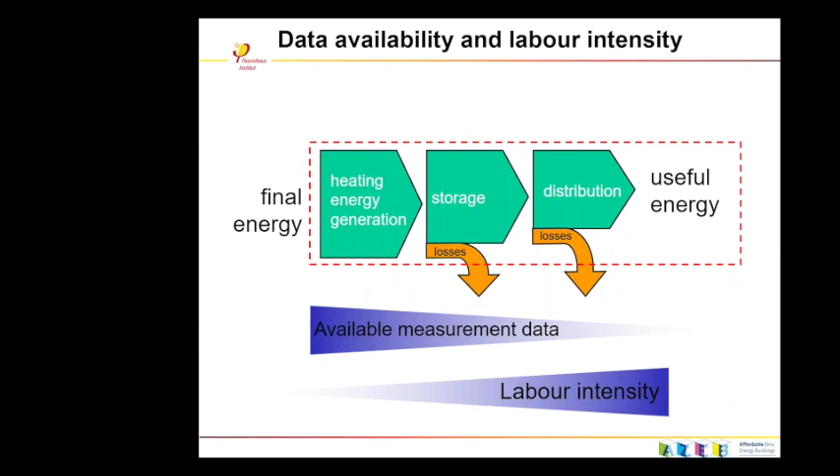That is not to say that very sophisticated monitoring is necessary in all cases. Much can be learned from regular meter readings. For example, we did a monitoring in a large office building, 3,000 square meters, and the idea had been that the building automation system would log all data, which it didn't quite do as intended, while the people who were operating the building recorded all important meters monthly, and this was the basis for a very successful optimization process, actually, even though we only had this rather simple data set available.

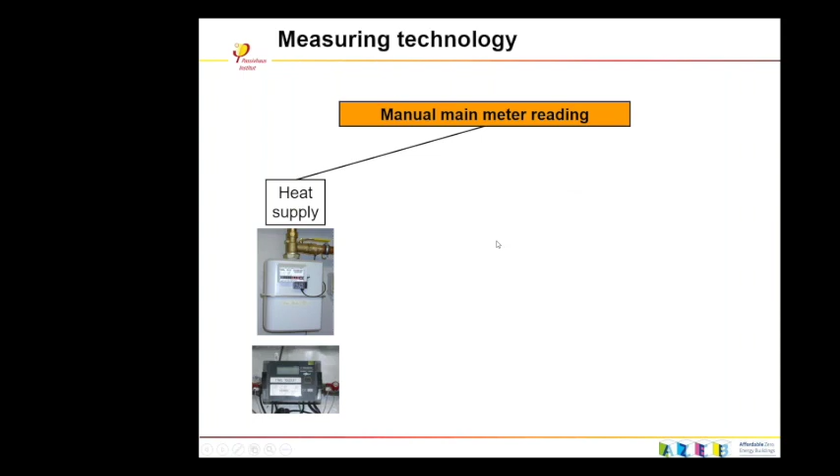But if you want to know more, then it also depends, of course, on the equipment you have in your building. For example, if you have a solar thermal system and you have no heat meter fitted to the generation of this solar thermal system, then you're kind of lost when you want to set up energy balances at some time, because an important fraction of the heat that is being used in the building is just not measured.

Heat meters for solar thermal systems are special. You normally cannot use the standard ones because they operate at higher temperatures than normal hot water systems, and they do not use plain water but a mixture with antifreeze, and so they need to be programmable for the thermal capacity of the fluid. But these are available, and if you want to know about a building with a solar thermal system, then it must be clear that you can only set up energy balances if you have this data available.

Electricity is normally straightforward when it comes to a utility meter. On the other hand, similar things apply when you have a photovoltaic system, and you normally have a separate meter for the feed-in, but if you do not have a meter for the total generation, then you are getting lost a bit. So some inverters provide this functionality to log all the generated electricity, at least to some accuracy. But if you're not positively sure, then make sure that a sub-meter is fitted for your evaluation purposes.

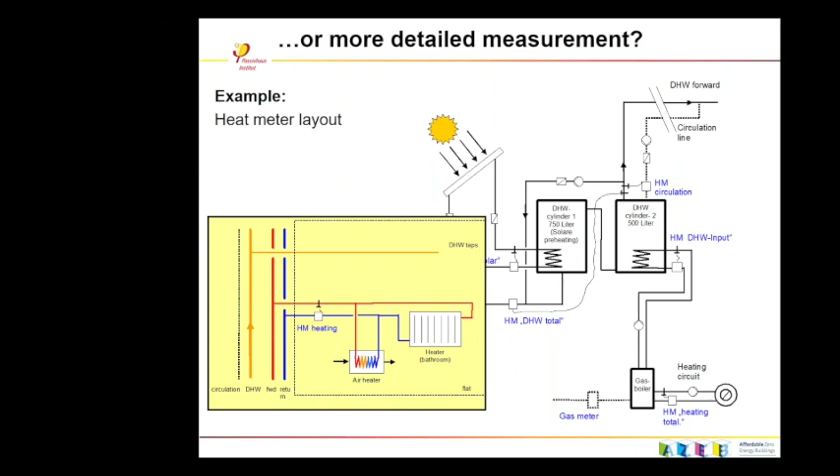And in this particular project, we went even as far as having heat meters for the hot water in all the apartments, which really was a crazy amount of data. And you can normally do that only for scientific purposes, I guess. But if you have a particularly advanced building services system that you figured would be an advantage, and you want to really learn whether or not it's worth the effort, then this is something you would want. Yeah, this is the subset in the apartments where we had heat metering for the heating circuit and another heat meter, which is not shown here, for the domestic hot water usage within the apartments.

When it comes to heat pumps, we would like to see a heat meter and an electricity submeter fitted in all cases, because otherwise you can never determine whether or not this heat pump is operating in a reasonably efficient manner. And to calculate the proportion of heat you get out of this for the electricity consumed, you just need those two quantities. Hopefully someday it will just be a standard feature of heat pumps to measure the electricity consumed and the heat put out. But even then, you need to be aware what electricity is included, whether it is only the heat pump proper or the auxiliary pumps and controls as well, which can make quite a difference in the coefficient of performance you calculate.

If you have a solid fuel boiler, then of course it's less easily metered what you put in as fuel. But in a school building we monitored, we just had a list or a log of the sacks of pellets consumed by date, and these 20 kilo or so sacks were a reasonably fine unit of measure for a 3,000 square meter school building.

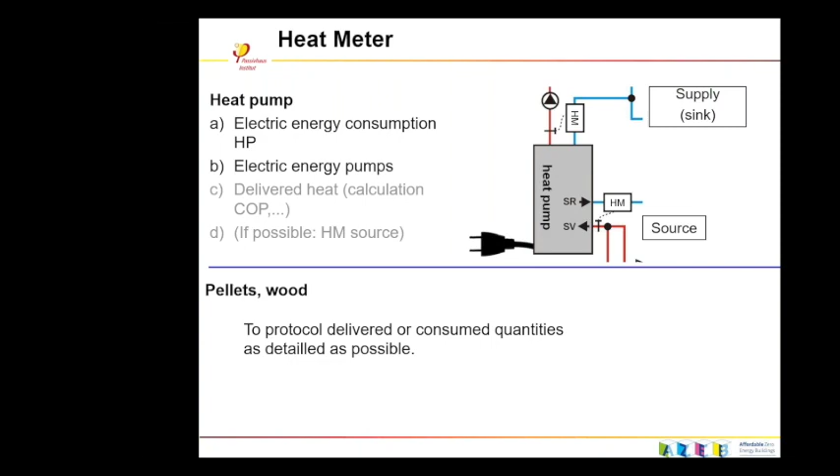Well, for electricity, of course, you have a utility meter, and for a normal house, this will be plenty good information. But if you're interested in the electricity consumption and efficiency of the MVHR, then it might be a consideration to at least temporarily fit a simple plug-in submeter like this, if you have a decent grade one. Some of those are really not very accurate, particularly at low power, but if you have a reasonably good one, then it is fine. And there are also some where you can insert an SD card and have a log over time to see, for changes or different ventilation unit settings, how much power is consumed. And this can inform you about whether or not the pressure drop in the system, for example, is at least roughly in line with what you have estimated in the design.

With water consumption, we have mentioned already, it's normally of less significance, but in some projects it's interesting also to see the negative contribution to internal heat by cold water usage, and then it might be informative to have this data and to have it in a temporal resolution. So you see whether or not the cold water pipes have been stagnant for longer times and taken up more heat, or whatever has happened.

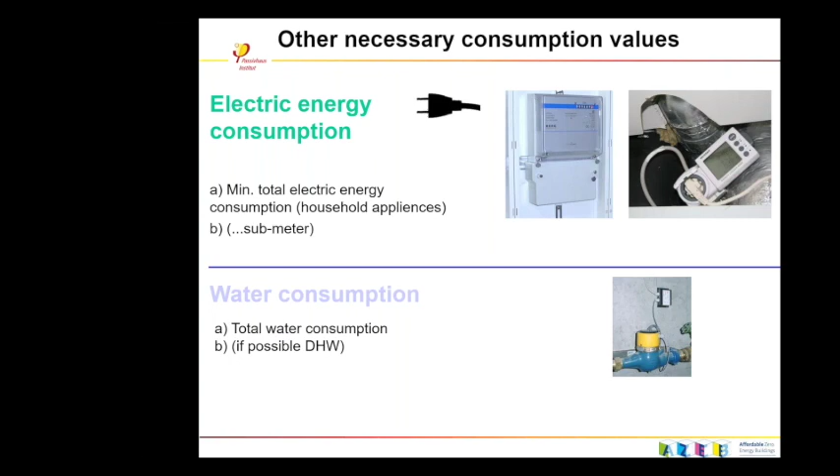Then there is a recipe for very, very simplified monitoring, which I would like to introduce very roughly, because it can be applied in almost any case where monthly meter readings are available. So if you have a house and monthly meter readings for gas consumption, if we assume a gas boiler as heat source, if there's a solar thermal system, we of course need monthly data on the generation of this. And we ask ourselves the question whether or not the space heating consumption was in line with what we have calculated with the PHPP.

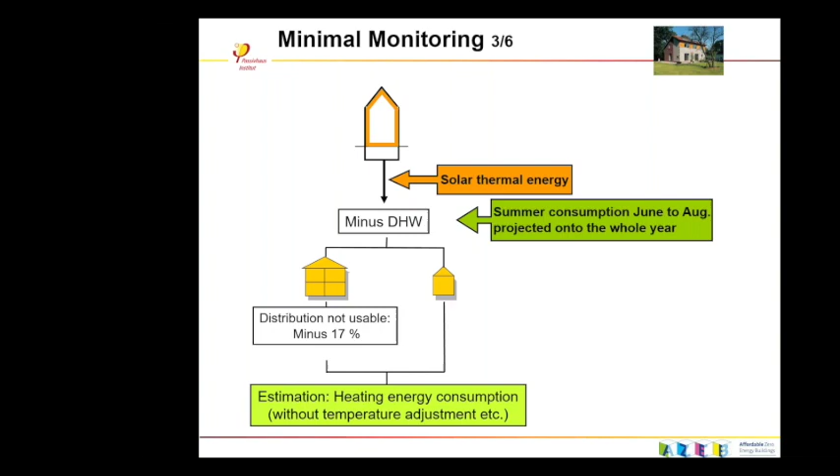Then we can at least estimate something that is useful, even if it's not totally accurate, of course. So if we assume this was a house of 150 square meters and we have total metered energy in terms of gas of 50 kilowatt hours per square meter and year, then we can use figures from experience from many monitoring projects we have done. For example, for conversion and storage losses in the range of 12%.

For the simplicity, we assume we have not the complication of the solar thermal system, but we can see from the heat consumption during the summer months, and this is why it is so important to have monthly data, we can estimate the domestic hot water fraction within the total, and then conclude that the remainder was the space heating consumption plus some distribution losses, which in this case amounts to just short of 20 kilowatt hours per square meter and year. So if this is all we have, then at least we have something, and we can see that we have calculated a passive house as maybe 15 and we come out at 20. So it's not exactly there, but it is not too bad either.

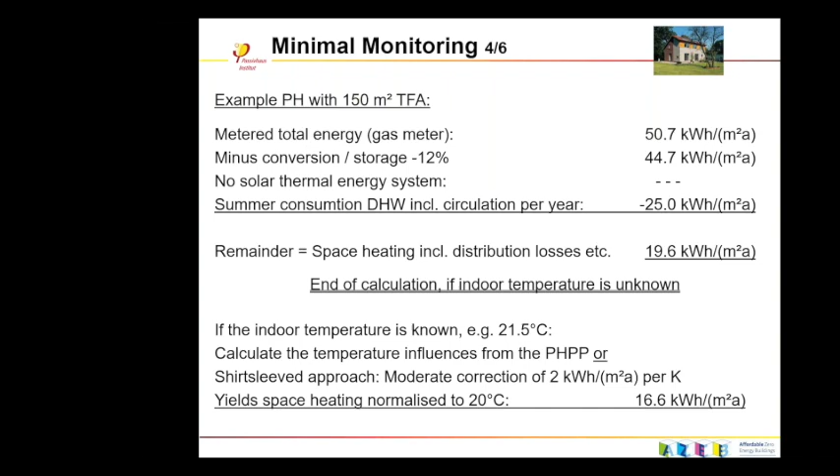And to this end, we do not need very much more than maybe logging the temperature inside and monthly meter readings, which can be taken manually. No need for electronic data acquisition, and still come up with a reasonable proof of general performance.

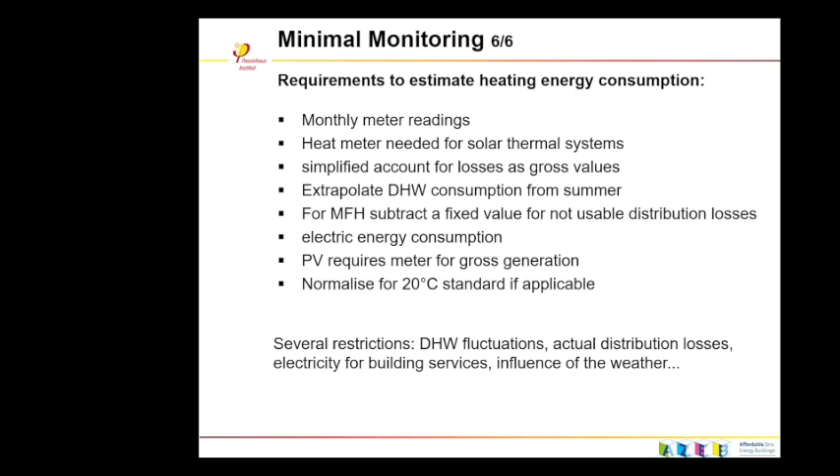So particularly for a school or other non-residential building, it's good to know about the weekends. In weekends, the building is generally not used, and no demands are put in for thermal comfort in those times. In schools also we have holidays. So if there are no internal gains and no usage of any kind, we do not have to bother about this decrease in temperatures.

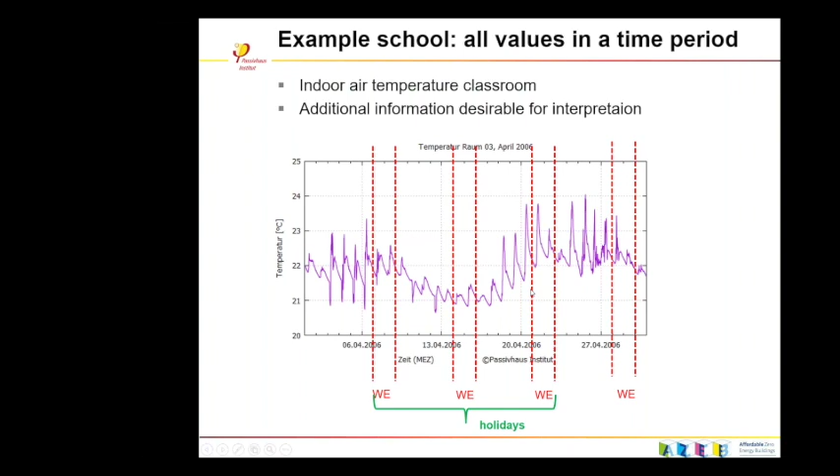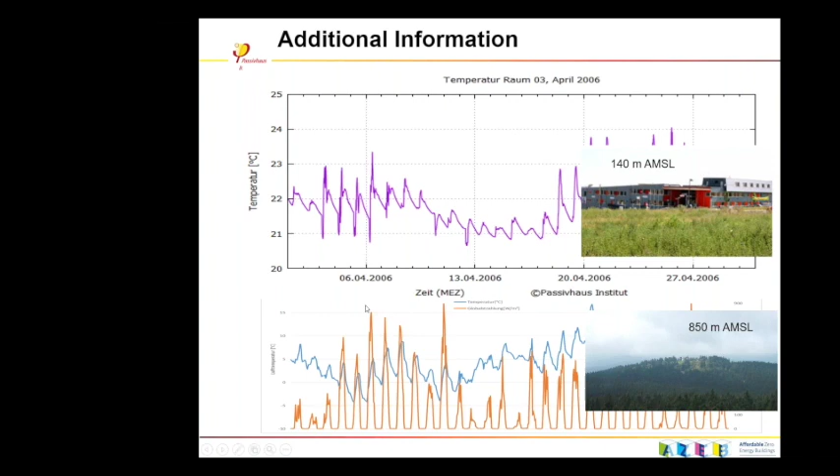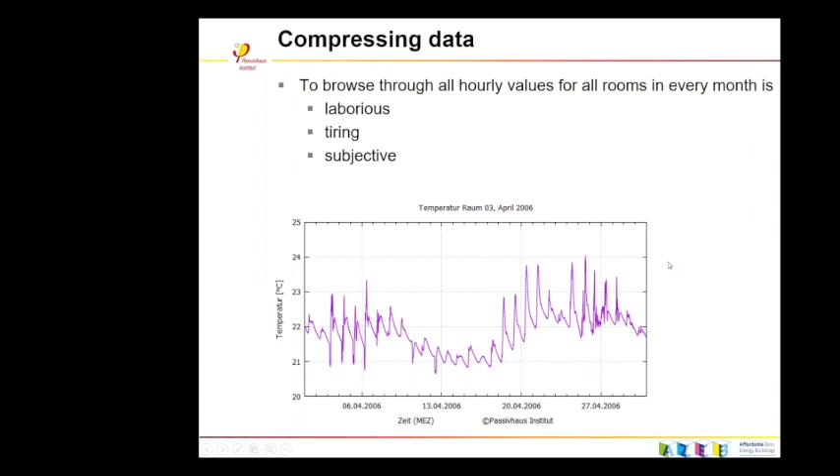On the other hand, if you have a school building, you have more than just one classroom and you want to gain an overview, it is very informative to just see the continuous timelines, but it's a bit laborious if you have to click through 20 such timelines and in every case interpret what you see. So it's a possibility, at least, to have the system programmed to make a statistical evaluation

So it's also about preparing and doing the number crunching in a way that is convenient for the evaluation. And we hope that in the future, building management systems will be better at incorporating such functionality.

So another cut and view on what is happening with the PHPP. We're currently working on implementing this in the PHPP 10 to be able to update the energy balance you have done in the design process with measured data from the building and from the weather, in order to come up with more detailed estimates than the very simple monitoring we have been looking at before.

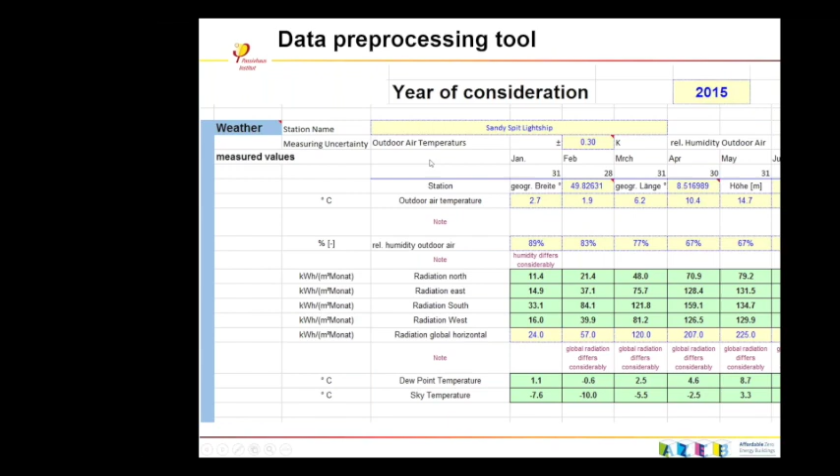So we can have errors in the global horizontal radiation and estimate the radiation as higher than it really is. And if we at the same time read the internal temperatures as slightly lower than it really is, then those two combine with a prediction of particularly low space heating demand.

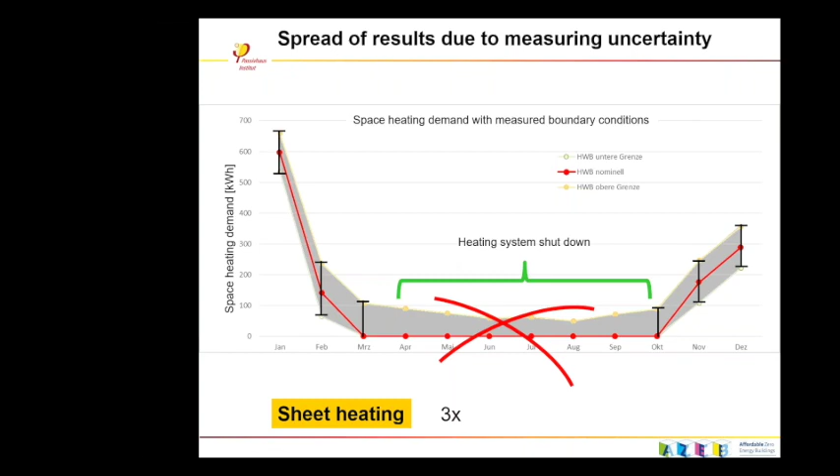But I think it will be a great help to come up with a somewhat standardized approach to simple building performance monitoring. And of course, we can also give the final energy values, not only the pure useful space heating demand. If we have data on electricity as well, then we can, of course, come up with detailed figures like an updated PER sheet.

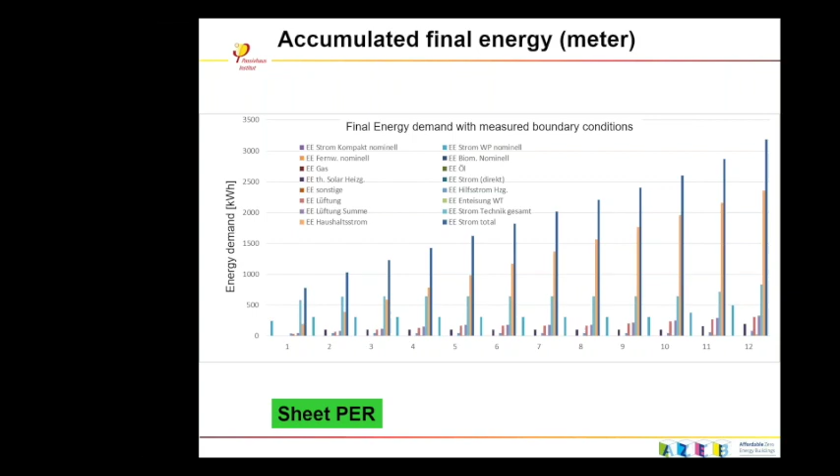So I think it will be helpful to also spot unclear points or malfunctions in buildings if we have a PHPP that is after commissioning updated month by month with all those metered figures and logged data, and then looking back, you can see for each month whether or not you are in this corridor or whether anything is out of control or suspicious.

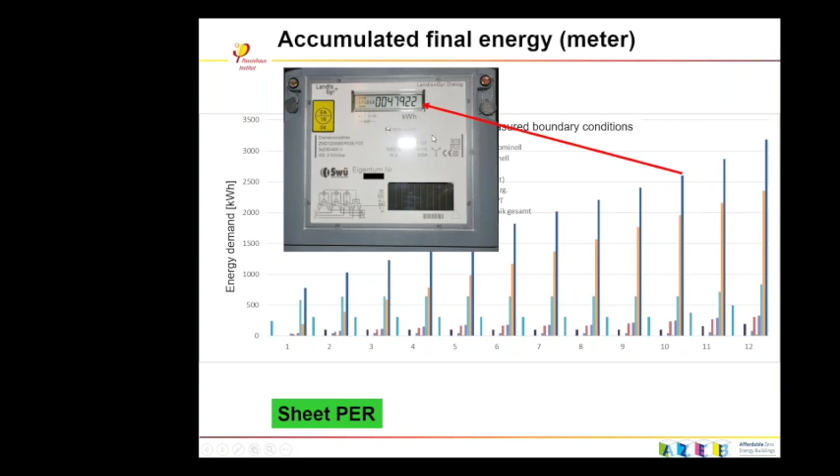Yeah, in this case, it's summed up from month to month, and so you can more easily compare it with continually increasing meter reading. Yeah, that was it.